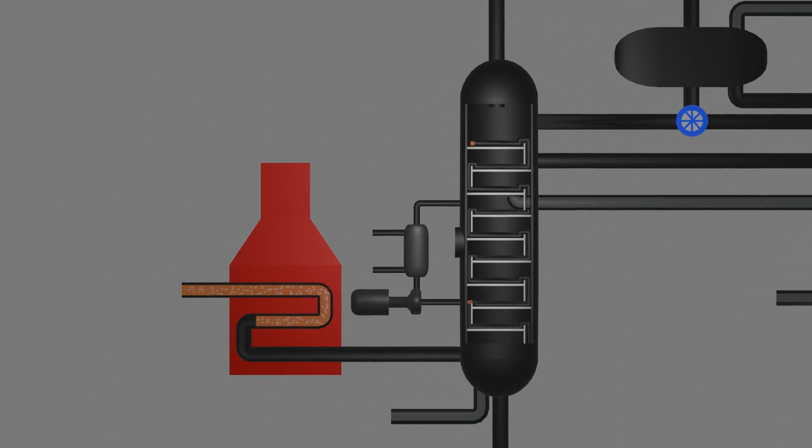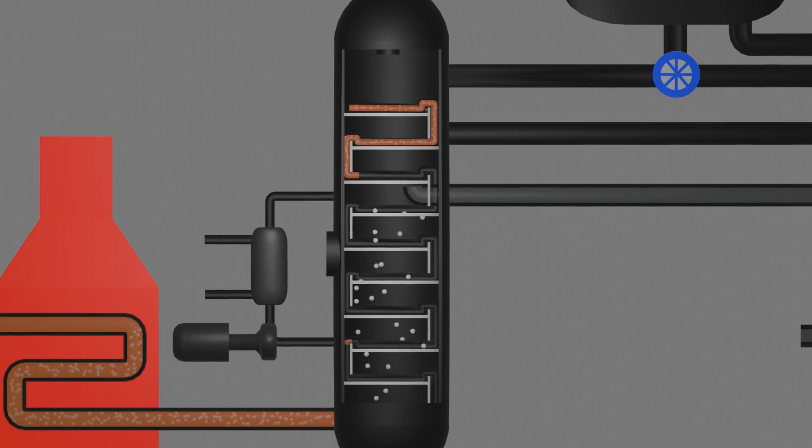Unlike a simple column, this 200-foot tower is a vertical sorting machine. Crude oil passes through a scorching hot furnace before entering the flash zone. A portion of the crude oil flashes while some flows across the plates.

In fractional distillation, you have a bit more going on as multiple components are being separated from the crude oil in one column. The feed is being distilled off at specific plates based on its boiling point.

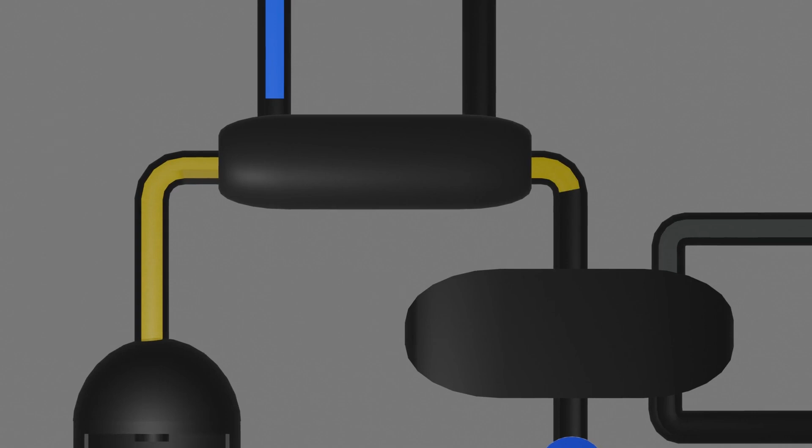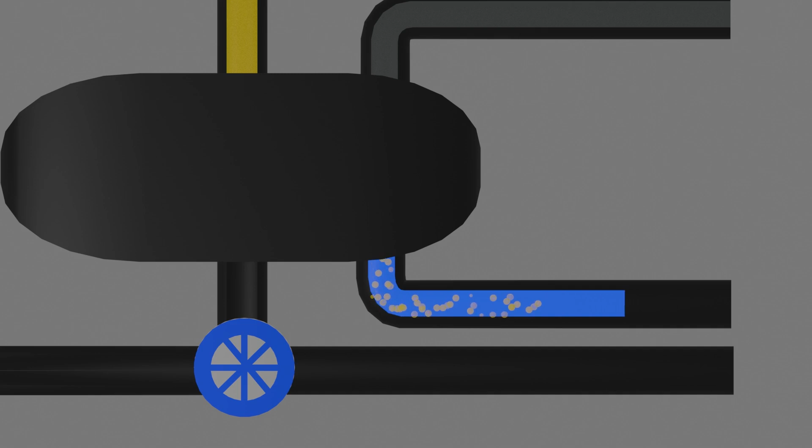At the very top of the column, you have a mixture of light naphtha, incondensable gases, and water which is passed through a condenser and separated via a reflux drum, which typically acts as a three-phase separator. The water is known as sour water and is removed from the bottom of the reflux drum. This is called sour water as it's high in sulfur and foul-smelling.

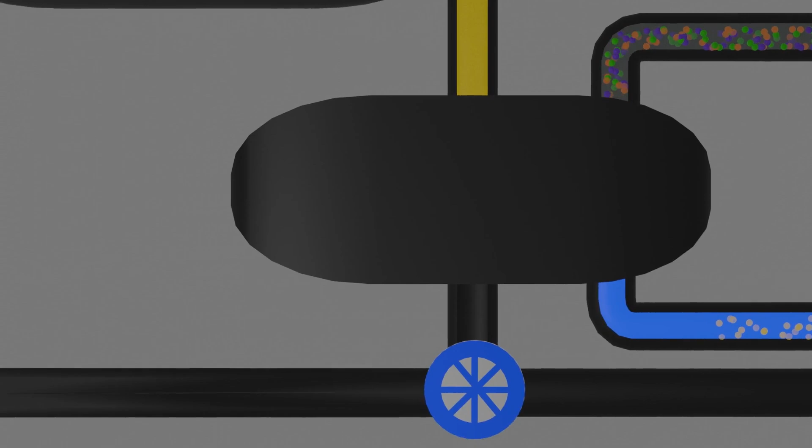The incondensable gases such as methane and ethane are removed from the top. Meanwhile, the light naphtha, which is commonly used for plastic manufacturing, is either recirculated back into the column or removed and made ready for storage.

A few plates below you could have heavy naphtha or kerosene, which has a higher boiling point and is distilled off a few plates lower down the column. Let's use kerosene in this example.

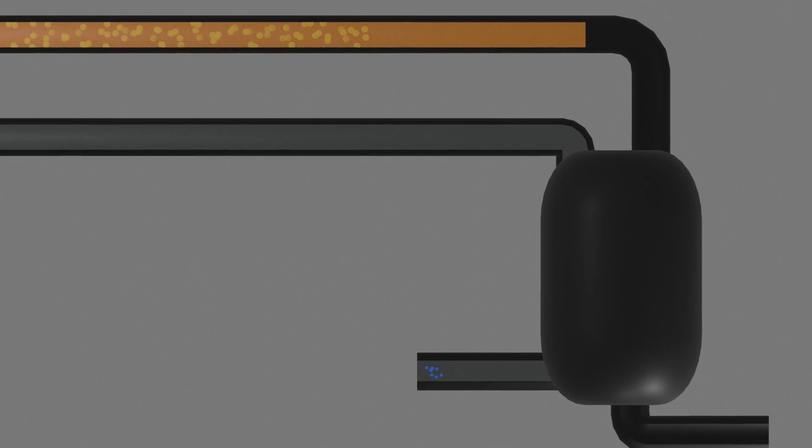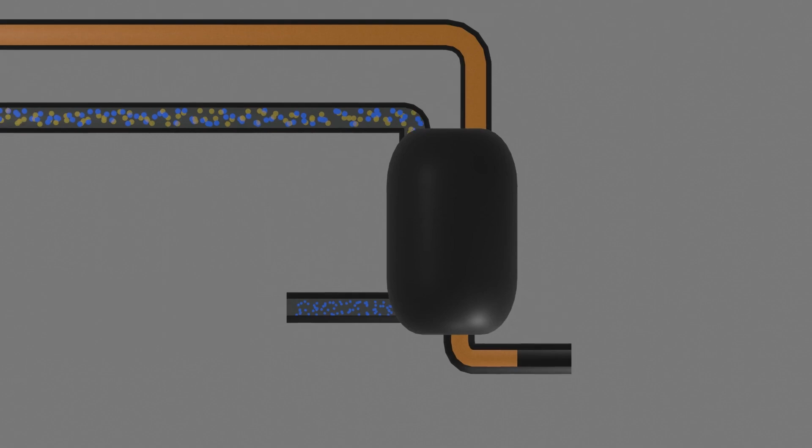The steam carries enough energy to vaporize any light molecules, like naphtha that accidentally got into the kerosene, without boiling the heavy product itself. The steam and the stripped light molecules travel out the top of the side stripper and are refluxed back into the main column 1 or 2 trays above where they were originally drawn. The cleaned kerosene, now with the correct flash point, leaves the bottom, goes through a cooler, and heads to storage.

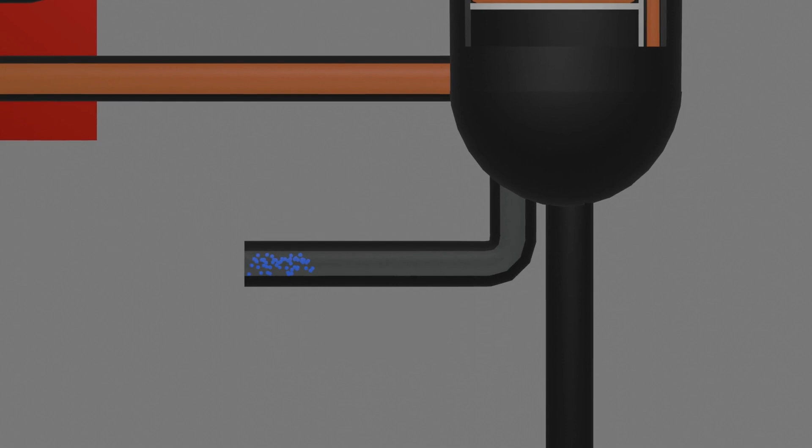Next we move on to the bottom section of the distillation column. In a standard distillation column, you'd use a reboiler to boil the liquid. But in crude oil refining, we use steam injection at the base for a very specific thermodynamic reason.

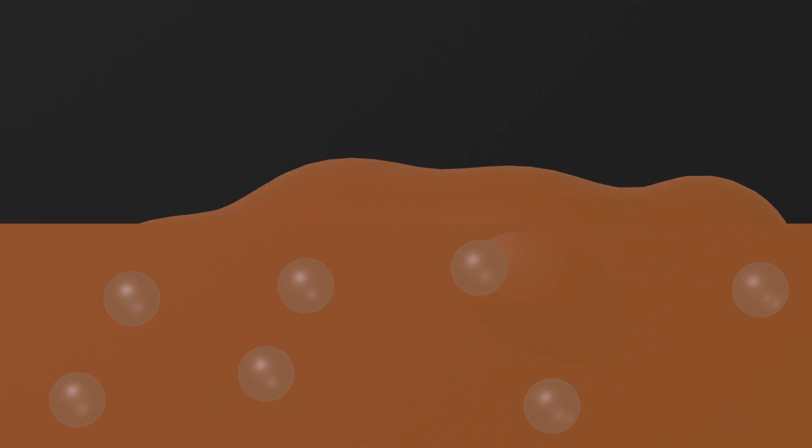In the bottom of that tower, you have the heaviest, goopiest hydrocarbons known as residue. They have extremely high boiling points. If you tried to boil them normally, you'd have to reach temperatures so high that the oil would crack and the molecules would literally shatter into charcoal-like coke, ruining your equipment.

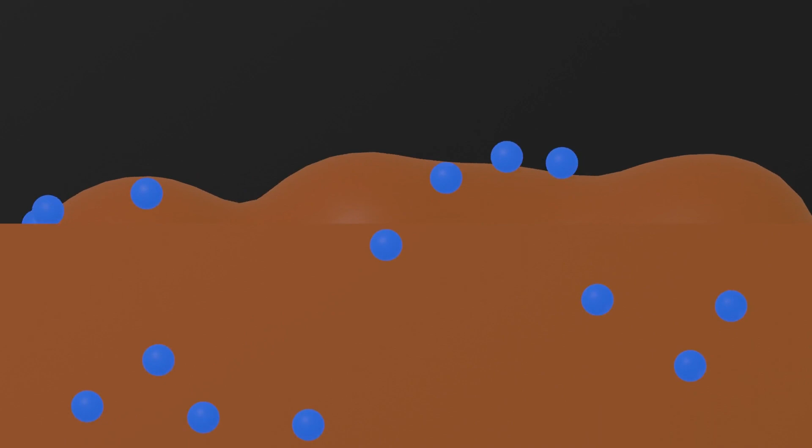By injecting steam, the steam molecules take up space in the vapor phase. This reduces the partial pressure that the hydrocarbons feel. The light parts of that heavy residue can evaporate at a much lower temperature, well below their normal boiling point. This allows them to escape up the column to be recovered as product. Meanwhile, the remaining residue is then removed from the bottom of the column and sent to storage for further processing.

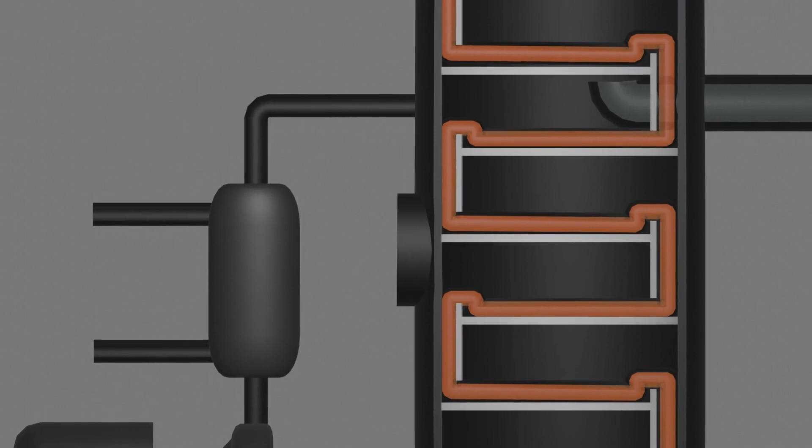You also have a pump configuration on the side of the column called a pump around configuration. This is strategically placed between 2 different product draw-off points. Its primary purpose is heating management and vapor control.

In a column this size, the rising vapor carries a massive amount of heat. If you only cooled the vapor at the very top via the condenser, the top of the tower would be overwhelmed with heat while the middle remained too hot to separate the liquids properly.

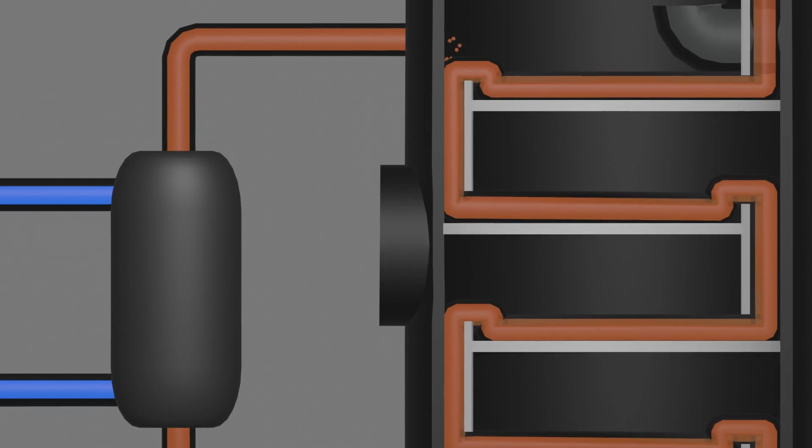The pump around takes hot liquid from a lower tray, cools it in an external heat exchanger, and sprays it back into the column a few trays higher. This shocks the rising vapor, causing the heavier parts of that vapor to condense into liquid right there in the middle of the tower. If you haven't already, check out my previous video on how a distillation column works.